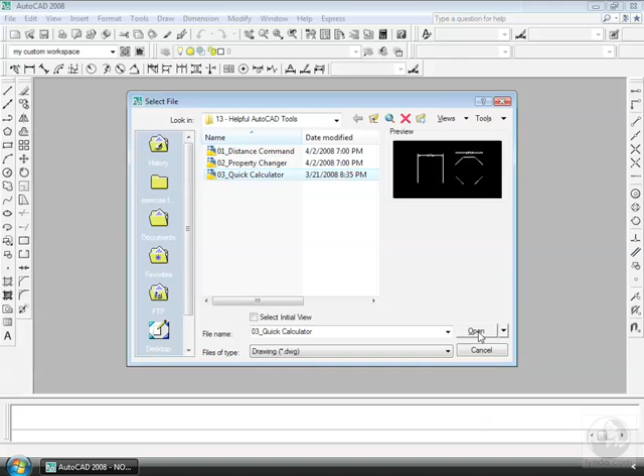Now I've got some sketch geometry here, and we're going to use this geometry to learn how the Quick Calculator works. Let's take a look at the square first. Let's say I would like to offset this left side such that I divide this square into thirds. Well, I know the overall length is 6.31, but calculating what 1/3 of that distance is in my head is going to be a problem. Let's use AutoCAD to find the distance.

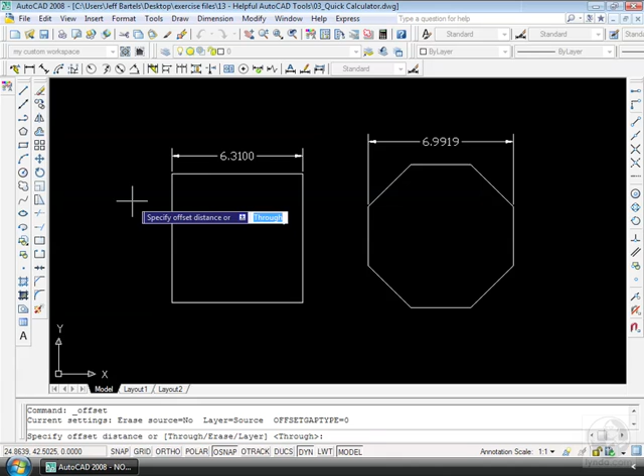I'm going to come over and launch the Offset command. I'll click the Offset icon, and AutoCAD's asking me for an offset distance. Well, I don't know what the distance is. Let's come up and click the Quick Calculator. I'll click the icon. This brings up my Quick Calculator palette. And from here, I want you to notice that it says the active command is offset. I can use the Quick Calculator transparently within a command. So whatever value I come up with is going to be applied to the offset command.

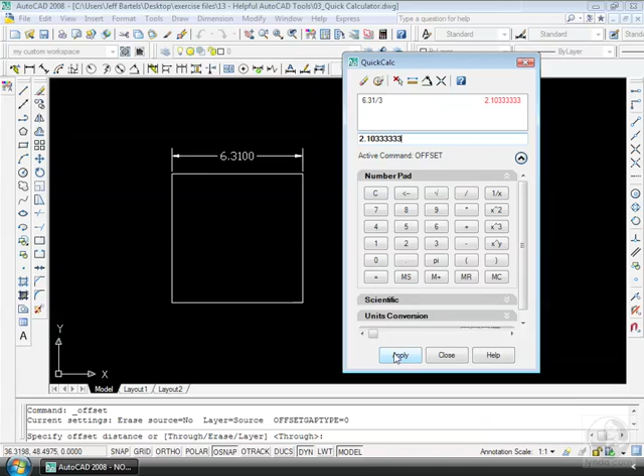Now I can enter my expression either by clicking on these keys or by using the keys on my keyboard. I'm going to type in my expression. 6.31 divided by 3. And I'll hit enter. There's my value. Now I'm going to come down and click my Apply button. And when I do, watch my command line. As soon as I click Apply, AutoCAD throws the number down at my command line, and all I have to do is hit enter to accept the value.

Now AutoCAD's asking me to select object to offset. I'll select this object and I'll offset to this side. I'll select this object and I'll offset to this side. I've just divided that square into thirds, and I never had to pick up my desktop calculator or try and figure it out in my head. Let me hit Escape to clear the Offset command.

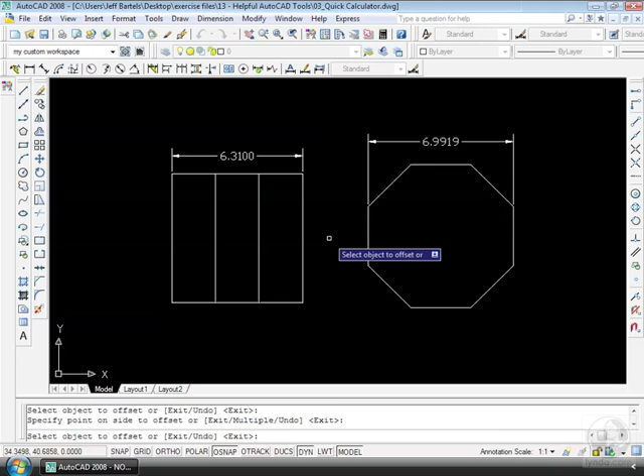Let's use the Quick Calculator to replicate this polygon. The Quick Calculator can be very helpful when drafting polygons because it always seems that when we're given a polygon, we always get the dimension of the diameter. But yet when we create a polygon, AutoCAD always wants the radius. So let's use the Quick Calculator to replicate this polygon.

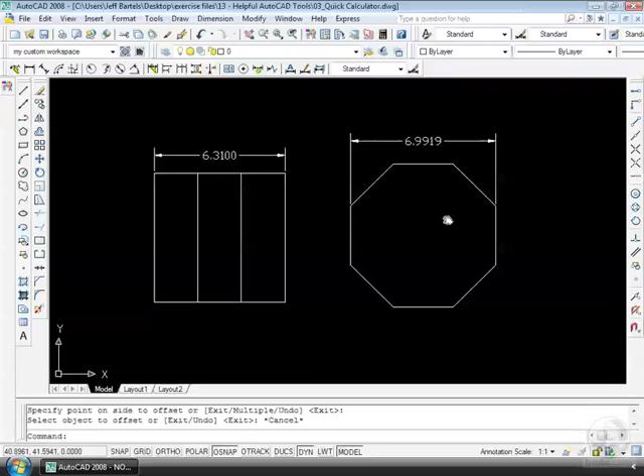I'm going to pan him to the side, and we're going to launch the Polygon command. I'm going to come over and click the Polygon icon. AutoCAD asks me for a number of sides. I'm going to type in 8 and hit enter. Specify center point. I'm just going to pick a point on screen. Now, is this polygon inscribed or circumscribed? Well, since my dimension is from face to face, this polygon must be circumscribed because it would fall on the outside of my circle. Let me select circumscribed, and at this point, AutoCAD's asking for a radius.

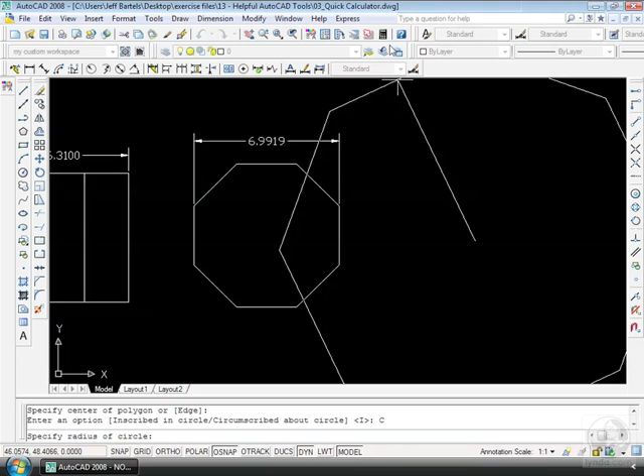Well, I have the diameter, but it's a very ugly number. Let's find out what the radius is by using the Quick Calculator. Once again, I'm going to come up and click the Quick Calculator icon, and it'll pop up on my screen. Notice the active command happens to be polygon. Let's do the math. I'm going to type in 6.9919 divided by 2. And I'll hit enter.

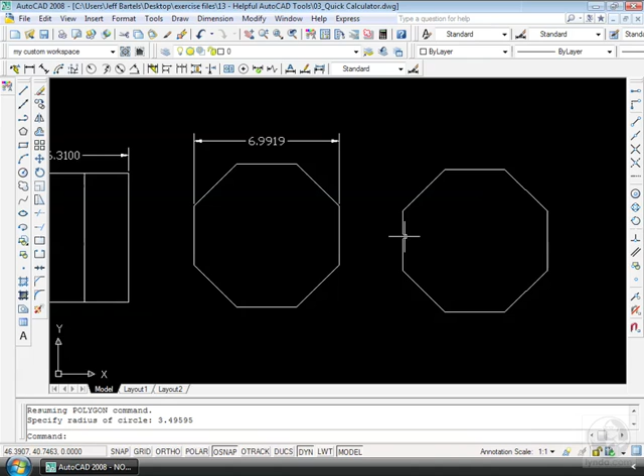There's my value. Once again, I'm going to click Apply, and that value is dumped to my command line. All I have to do to accept that value is hit the Enter key. I have just replicated that polygon using the Quick Calculator command. While the Quick Calculator may not completely replace the handheld calculator we keep at our desk, it certainly makes quick computations within AutoCAD much easier.